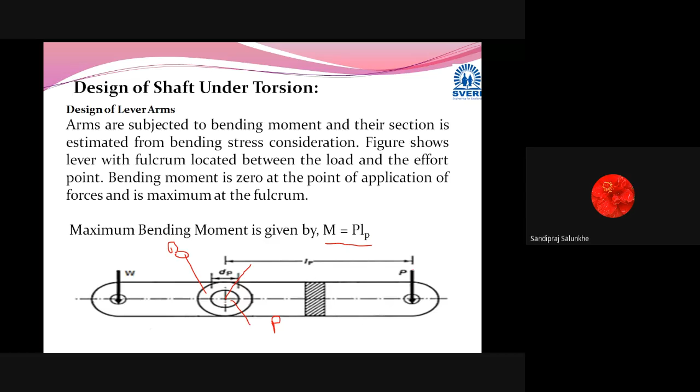If this bending stress is less than the allowable one, then we are going to say that the design is safe, in which M is nothing but the moment which we are going to calculate, and that moment will be calculated by means of force multiplied by distance. Either this force and this distance we can consider, or we can consider W multiplied by whatever may be the length of the W.

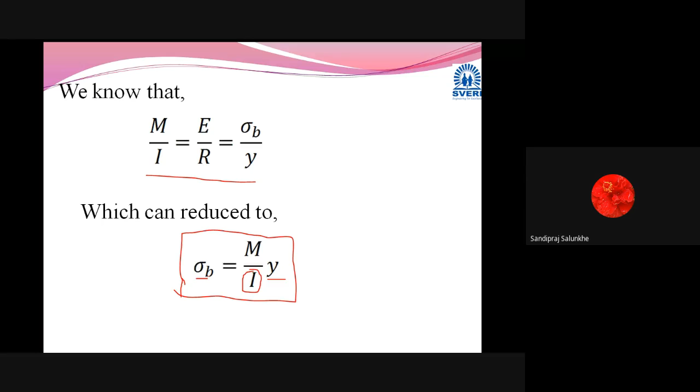And I is the moment of inertia of the cross section which we are going to consider for the lever. I think we have already discussed which type of cross sections are used for the lever, and what are the equations of moment of inertia for that lever. Also, we know that y is the distance of the uppermost fiber from the neutral axis of that lever. So by means of this, we are going to calculate sigma b, that is the bending stress, and we are going to check whether it is in limit or not for the lever plate, right?

This slide we have covered. Now for this slide, what we are going to consider is the values of I and Y for the selected section, that is nothing but the previous slide which we have seen. Out of this, you can choose any one section which will be given in the problem statement: rectangular or elliptical section or I section also, or it depends upon the designer. The designer is going to choose as per the requirement of that load or whatever may be the duty of that lever, we can say heavy duty, light duty, or middle one. Depending upon that, we are going to select the cross section.

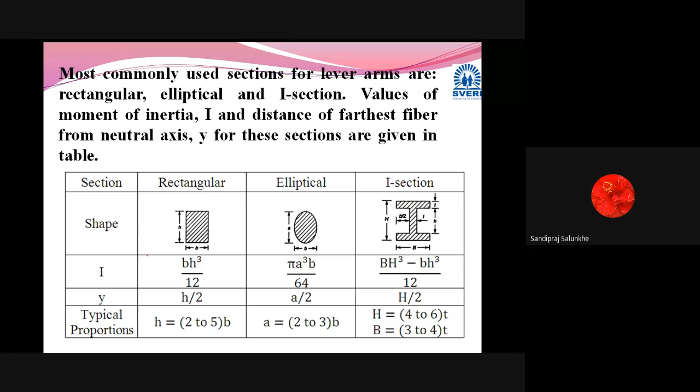So when we are going to take the suitable cross section, then this value of I and Y for the selected section is determined, and afterwards it is used for the calculation, so that the bending stress will remain within the allowable limit. By means of this I, that is moment of inertia value, and Y value, sigma B is checked whether it is within the limit or not, and if not, then we have to choose the higher dimension.

Okay. Then normally when we are going to select these lever arms, when we are going to put this boss in between the fulcrum pin and the lever arm, as we are going to drill a hole there, this area is going to become weak, and as this area becomes weak, we have to strengthen it, so that the lever arm will sustain the load.

So what method we are going to use for that? Here you can see the thickness of lever, we can mention this as thickness T, but at the point of fulcrum, this thickness has increased. Are you getting it? And this additional area, this one, and this one, is going to provide more strength at this point, where the hole has been drilled in the lever. Okay, this is one method.

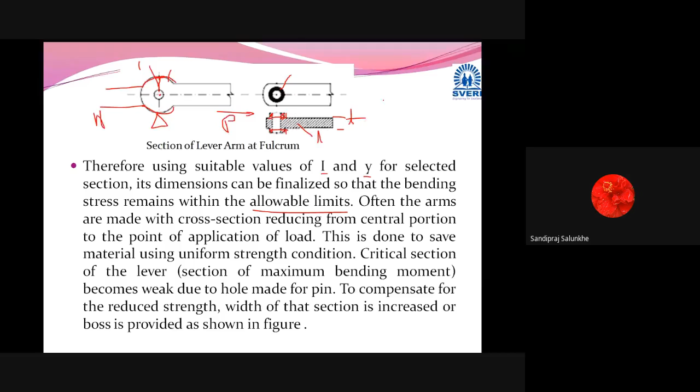Other way, you might have seen such type of levers where the fulcrum is used here. This is the effort side P which you are going to apply, and this is the external load side W, and this cross sectional area is increased here, so that whatever stress concentration has taken place because of the drill we make in the lever arm will get compensated with the additional area, and this is going to take the bending moment or the bending stress generated in the lever.

Because you can see here that the maximum stress will be generated at this point of fulcrum only, rather than the other part of the lever. And while we are solving problems, we will come to know how to decide the dimensions of the lever at the point of fulcrum, as well as the length of the lever. Length is decided by means of the leverage principle and the formulae which we have calculated.

Important thing is how to calculate the reaction at this point, because further for the designing, we are going to take this reaction at this fulcrum point. Okay, this is what this slide is explaining.

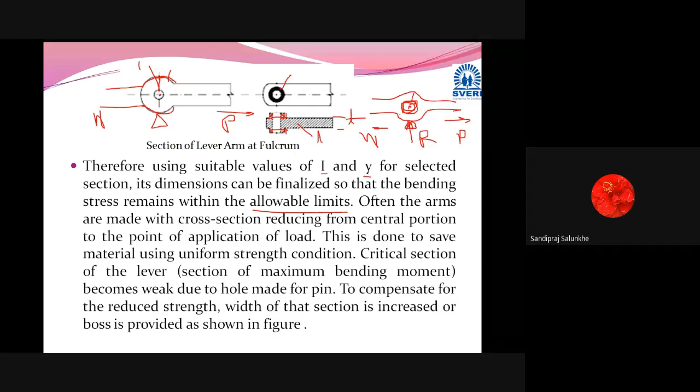Okay, the main part of this lever is design of fulcrum, because once you are going to design that lever arm, you can select the cross section and you can choose the dimensions for that lever arm. Okay, only the important calculation is how to calculate the reaction at the fulcrum point. Also, you know that applied effort multiplied by its distance is equal to the external load multiplied by the distance from fulcrum of that load.

So from this you can calculate moment, and from the moment you can use that equation M by I is equal to sigma b by y. And if you are going to select the cross section, I can be calculated and y also can be taken. So this M is calculated by means of P multiplied by distance from the fulcrum of that P, or W multiplied by distance of that W from the fulcrum point. And by this means you can decide the dimensions of that lever arm.

Now, important point is when we are going to decide the dimensions of this pin, can you just give me some hint where such type of pin we have designed somewhere in the previous design procedure? In the knuckle joint, sir. In knuckle joint, right? In case of knuckle joint also, such type of pin we have designed, where double eye and single eye we have seen.

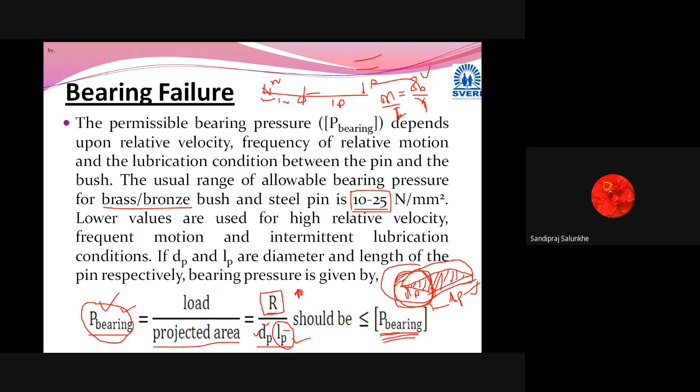No, sir. No. Okay. If you have any doubt, you can write in the chat box or we'll move further. Shall we go?

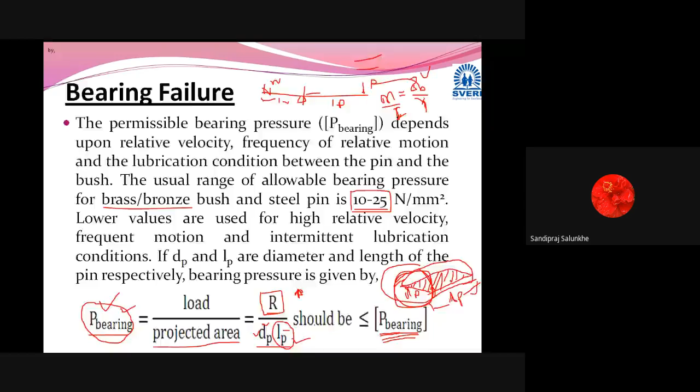Okay, now we'll go to the normal consideration, that is the failure of that pin. We are going to calculate the dimensions of that pin. And if we select that dimension of pin, then we are going to check whether the shear stress generated in that pin is less than the allowable shear stress of the pin material.

What it means: here we are going to consider this pin is subjected to double shear, as we have already seen in the diagram. At this point and at this point, shearing is going to take place, and we consider the cross section of the pin is circular with diameter dp, right? So we know that stress is equal to force divided by cross sectional area.

Now the force which is coming is the reaction provided here at the fulcrum, which we can calculate with the formulae we have derived. This is the force situation. So the total force for shearing is R, and the cross section which sustains that shear stress is the cross sectional area at this point plus at this point, because shearing is taking place at two places with the same force system.

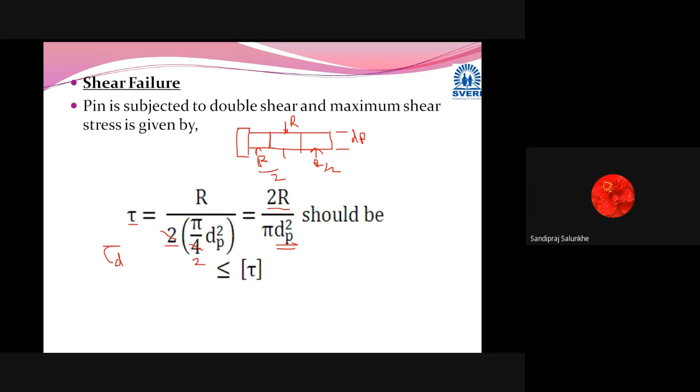Now, as in the case of a knuckle joint, the pin is going to sustain the bending load also, and we consider relative motion between pin and lever. So it will undergo a bending moment, and it is assumed that the load acting on the pin is uniformly distributed. I will erase all the things first and then we will go further.

Now when we consider this pin, we consider that the force acting is uniformly distributed. This is on the upper side, and the force coming at the lever side is in the downward direction. So this uniformly distributed load acts on the pin, and the pin will undergo bending. For the support of this pin, we consider T by 2. Here it is supported.

And it is acting exactly at the mid, that is B by 2, where we consider the total load is acting. Total reaction acts at T by 2, whereas the total external force acts at B by 2. To decide this distance, we consider this midpoint, and from this midpoint, the distance of the support is what we have to calculate for the bending moment. Am I right?

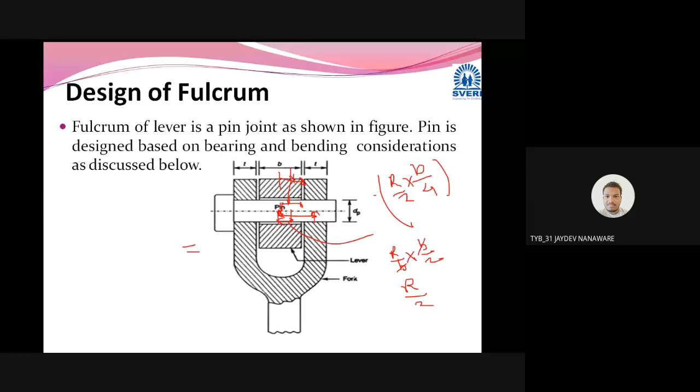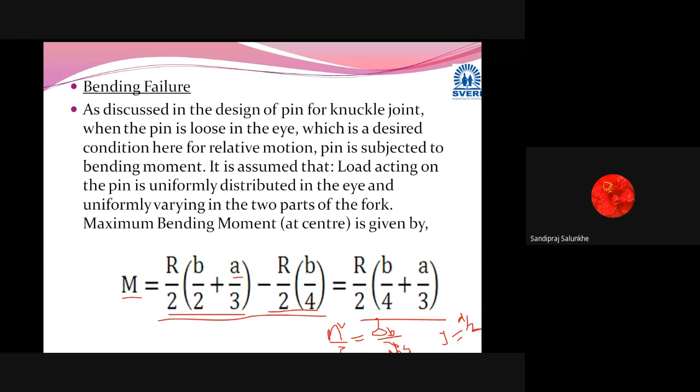Am I right? And once you have calculated this MB, we can calculate the sigma B. Yes sir. Okay. This sigma B value we have to check whether it is within the limit or not. And where this I is calculated as pi by 64 dp⁴, y is considered as dp/2.